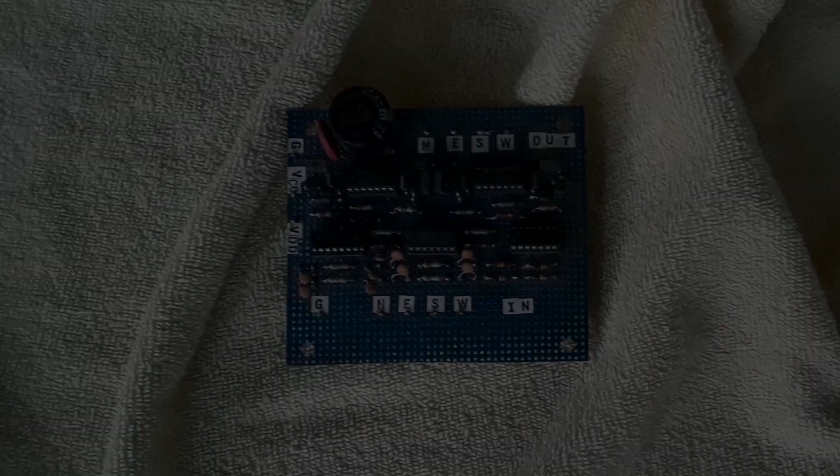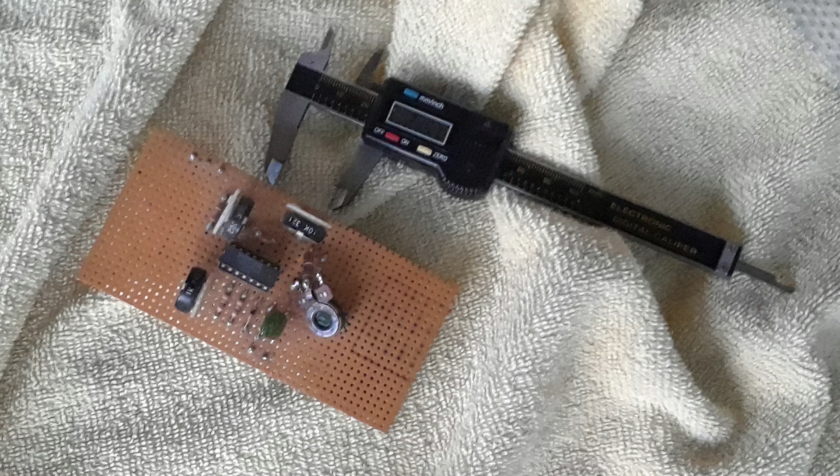Imagine a world where you just built a project, and this project turned out so well that you thought, hey, this thing needs a cabinet. Imagine further that all you had to do was measure the board, start a program, and drop just 4 dimensions into that same program. In a minute or two, you had an STL file ready to send off to your 3D printer. Find that hard to believe?

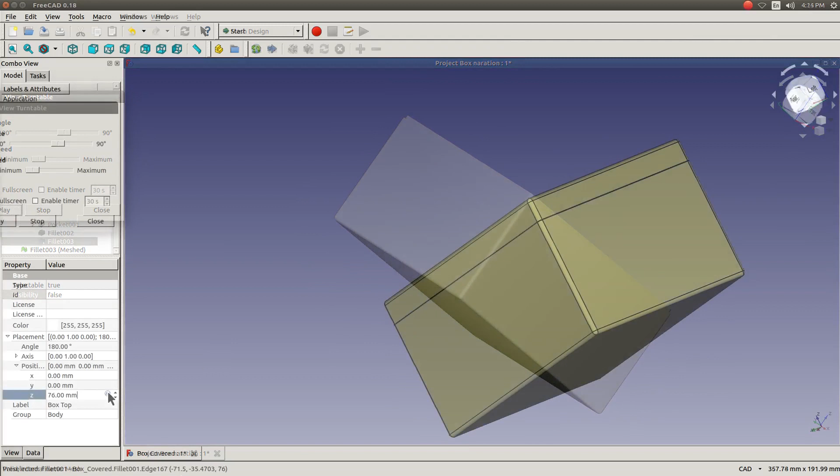Well, think again. The year is 2020 and the process is called parametric programming. Once you learn the process, you'll never have to suffer the drudge work of creating another cabinet drawing again, and it's surprisingly easy to do. Today I'm going to show you my program and how you can custom create your very own. So sit back and get ready to hand more drudge work off to your computer. After all, isn't that where drudge work belongs?

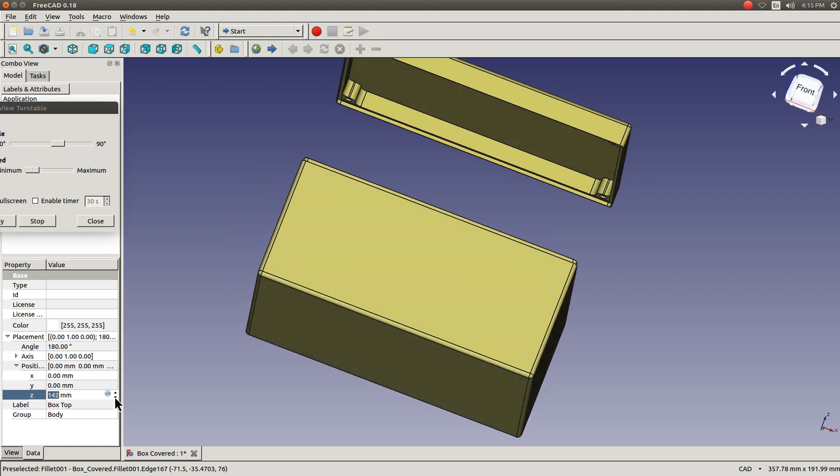As part of the maker community, sooner or later you're going to need a container to house projects like these. On the left is a kit which included no cabinet. On the right is a scratch-built function generator. It was a quick and dirty project which I never considered permanent. Though rough and crude, it turned out to be so useful that I decided to give it a permanent housing.

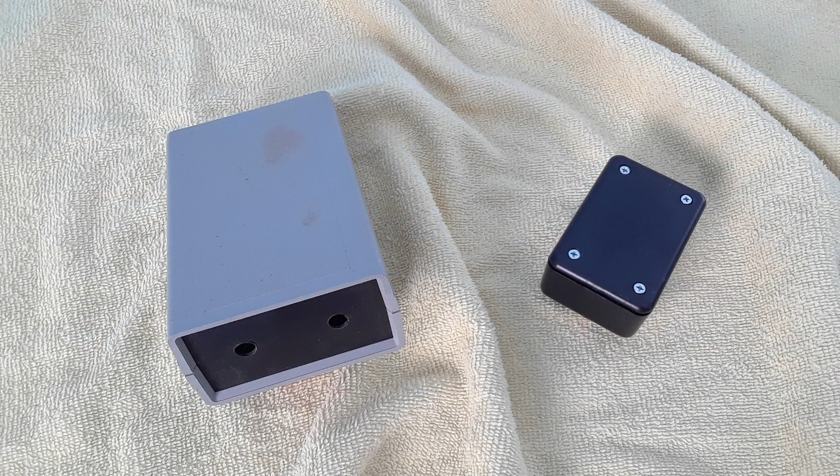If I decided to buy an enclosure, I would have to search the net for a suitable compromise. As you can see, these things are usually oversized or overpriced. Additionally, they're really not exactly what you're looking for in the first place.

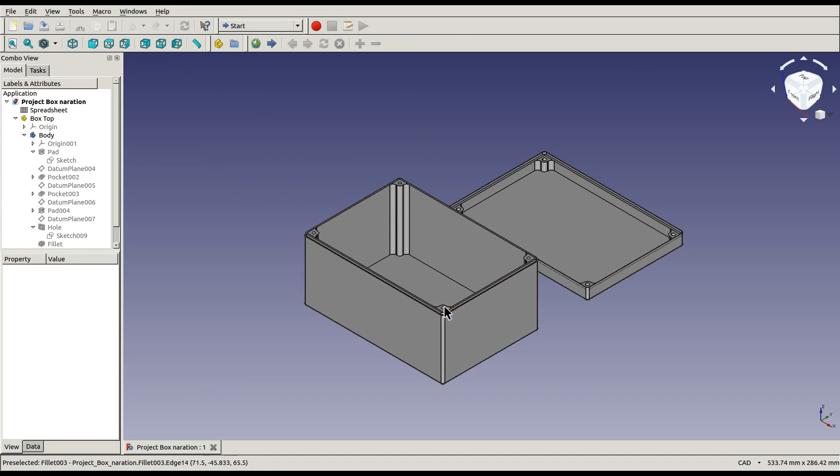Here we have the enclosure we're going to create, though we haven't yet told FreeCAD the size we want. Also notice there are 4 bosses, 1 in each corner, with a hole to accommodate a screw. Looking at the box from the bottom, notice the 4 screw holes, which are countersunk to accommodate a flathead screw. FreeCAD is a real nice tool to do this sort of thing in just one step. We'll cover this tool in detail much later.

Again, looking at the top view, I want you to notice the distance of the flat part of the wall. For the current screw size selected, this dimension, including the wall thickness, is always 24.7 millimeters smaller than the outside dimension of the cabinet. As long as you don't change the screw size, this will not change. Later in this series, I'll show you a simple way to make this measurement.

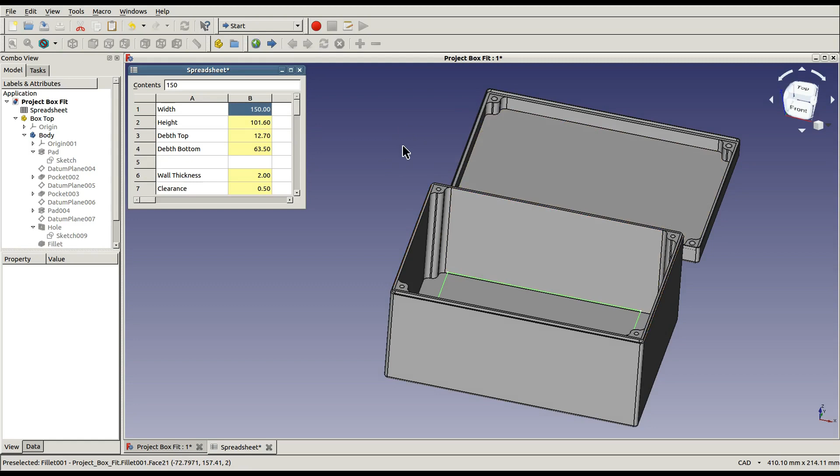Anyway, back to the project at hand. Before we get into this, I want to say that I'm going to deliberately leave cabinet space at both ends of the enclosure to allow space for outboard potentiometers, banana jacks, as well as a barrel connector to supply power.

I measured the board with an inexpensive digital caliper, though a simple ruler is more than adequate. The board dimensions are width 114.3 millimeters, height 57.15 millimeters.

As you can see from this view, I did the connections with a wire wrap tool. The distance from the pin bottom to the circuit board is 18.843 millimeters.

The thickness of the circuit board is 1.55 millimeters. The distance from the top of the board to the highest component is approximately 21.87 millimeters. Adding all of the height dimensions gives a total of 42.263 millimeters. We'll break this total down, giving part to the box top and the rest to the box bottom.

These are the 4 dimensions I was talking about at the beginning of the video.

We're back again at the enclosure drawing, and as you can see, there is a small spreadsheet insert in the upper left-hand corner of our drawing. Unfortunately, all of the dimensions in that sheet describe the outside of the enclosure. Thus, it will be necessary to calculate these values based on the size of our board. Also notice that I created a sketch which floats above the floor of the box bottom. This is really not part of the parametric drawing. It's simply an aid to check if we made any serious blunders in our box calculations.

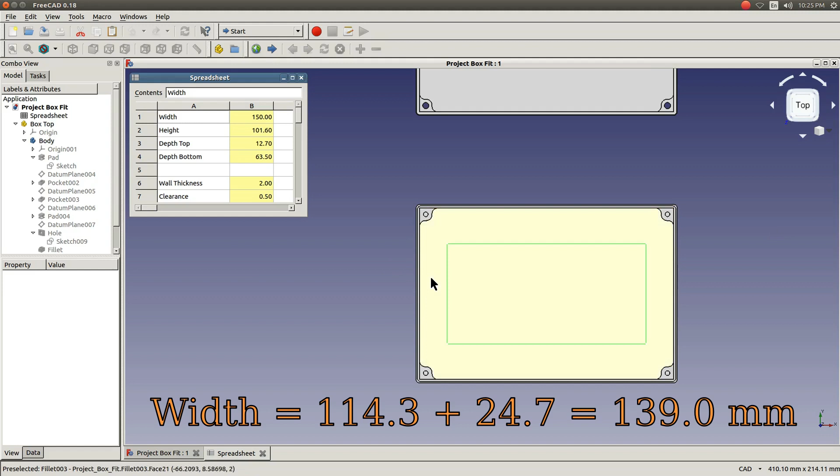The height is found by adding 57.15 millimeters plus 2 times 2 millimeter clearance. We'd like 2 millimeters of clearance above and below the board, plus 2 times the 2 millimeter wall thickness, giving us a total of 65.15 millimeters.

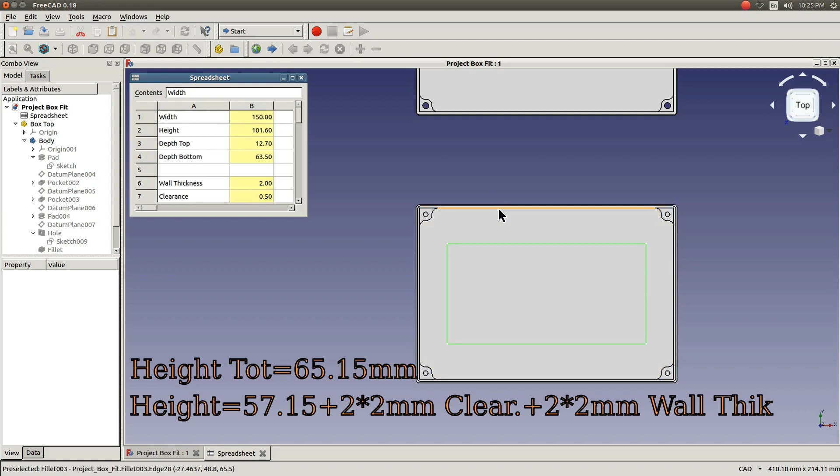As for the depth of the box top, I've arbitrarily chosen 9.5 millimeters. Adding this to the 2 millimeter wall thickness gives us a total of 11.5 millimeters.

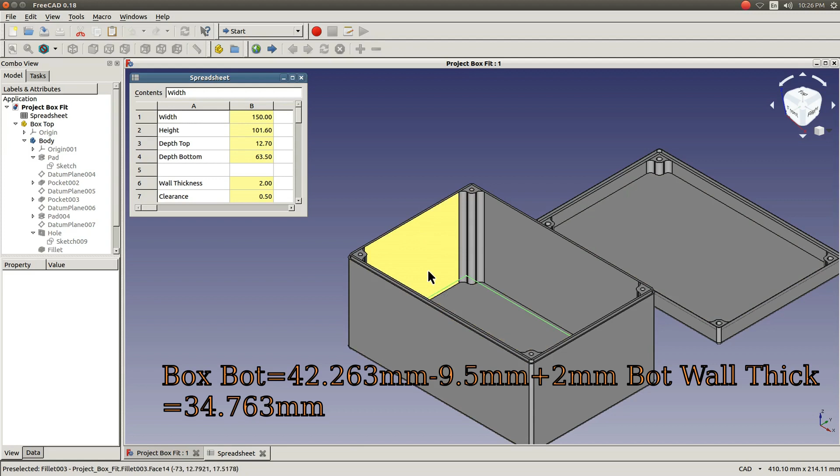Subtracting this from the total board height we found earlier gives us 42.263 millimeters minus the 9.5 millimeters we just chose, plus the 2 millimeter wall thickness, gives us a total of 34.763 millimeters.

This completes the 4 dimensions we'll need, so let's begin punching these values into the spreadsheet. Before we do, I want to mention that my best computer is suffering an intermittent problem, so I had to fall back to the computer that I usually use for my CNC machinery, which is nearly old enough to vote. If you have a newer computer, it's likely that these response times to the values we enter will be much faster than what you see here.

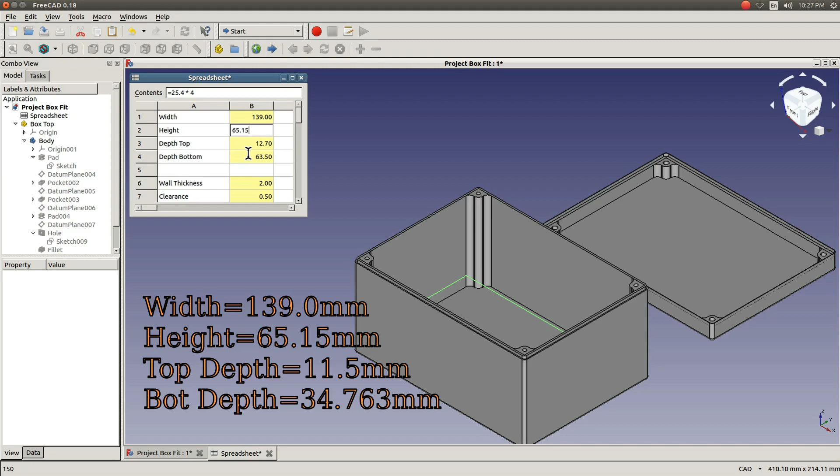First, we'll enter 139.0 for the width. Next, we'll enter 65.15 millimeters for the height. We'll now enter 11.5 millimeters for the box top depth.

Lastly, we'll enter 34.763 for the box bottom depth.

We now have the completed box ready to convert to a mesh file and send off to our 3D printer.

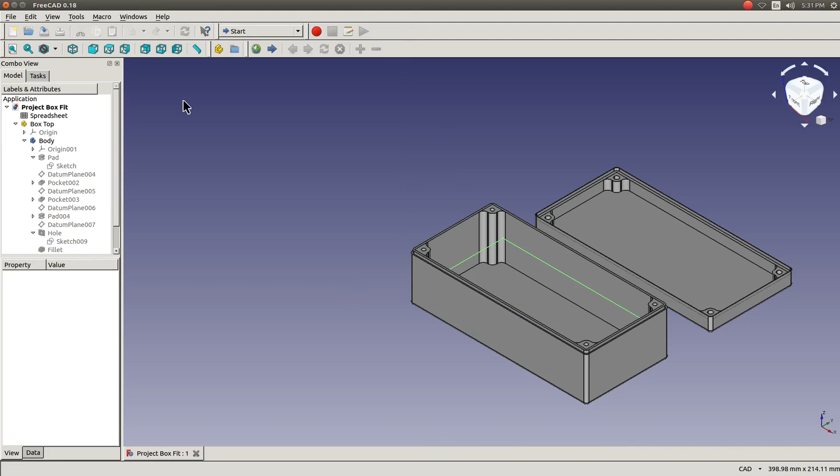Anyway, back to our model. From the time I began punching these last 4 dimensions into the spreadsheet to the program displaying a model ready to convert to an STL file, took only 1 minute 6 seconds. Seriously? I don't care how good a programmer you are in CAD, or for that matter, what CAD program you're using. No one, and I mean no one, can create a project enclosure from scratch in 1 minute 6 seconds.

For our last step, and yes, every CAD modeler has to do this, we need to convert our enclosure to an STL file. First, we need to select the Mesh Design Workbench from the drop-down menu.

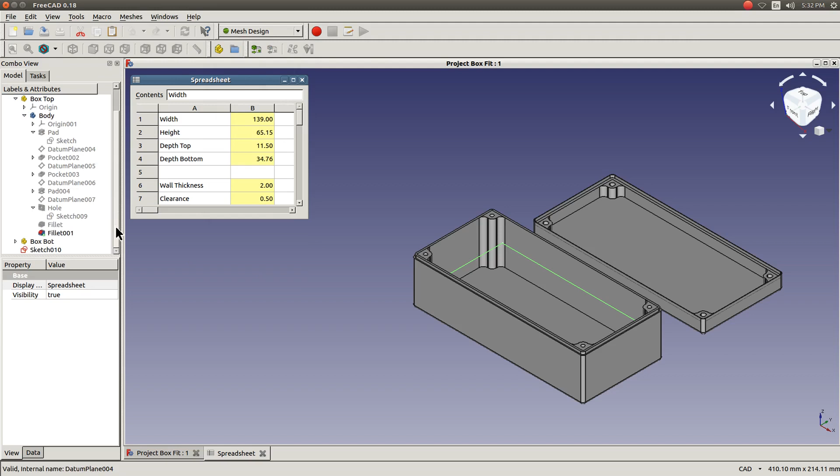Then, from our combo view, we need to select the model tree. From our box top tree, we'll go down to the bottom and select Fillet 001. You'll now notice that the box top is highlighted in green.

Next, we'll go to the very top toolbar and select Meshes. From the drop-down menu, select Create Mesh from Shape. From the combo view, which has switched from Model to Tasks, select the Standard Option button and press the OK button.

You'll now notice the box top has been enveloped in a mesh. To better see the mesh, from the model tree, again select Fillet 001. From the menu directly below, select Visibility True and convert it to False. Although this step is not necessary, it makes it easier to see our box top mesh.

Now go to the very bottom of the model tree and notice an entry labeled Fillet 001 Meshed and select this entry. If you look at the bottom row of the top toolbars, you'll notice 4 icons have suddenly changed color. We're going to select the icon which exports a mesh to a file. If you're in doubt as to which one that is, just hover your mouse over each button. An explanation of the button will pop up.

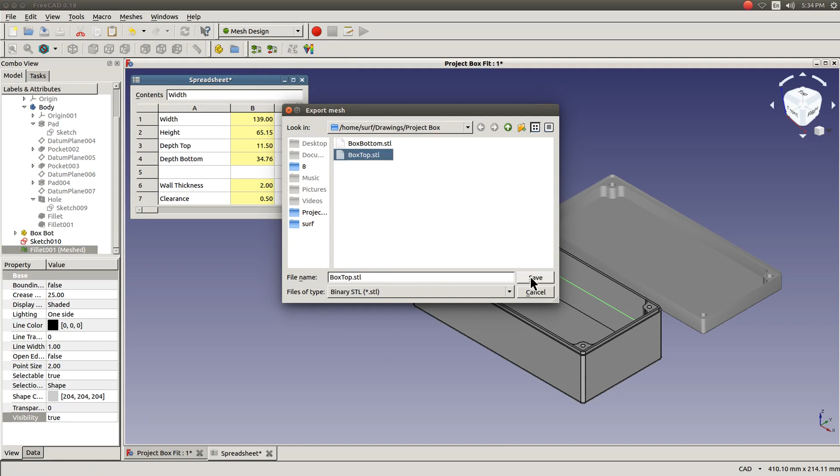You'll now notice a file menu appear, directing you to enter a name for your file. In my case, I'll choose Box Top, then press Save. Notice that I got a message that this file already exists. I'm going to press the Yes button because this file was for another enclosure which has been copied off to my slicer program. We're now going to close our box top tree and open our box bottom tree.

Heading to the bottom of that file, we'll select Fillet 003 and notice it gets highlighted in green. To save you from the boredom of watching me repeat this process, I'll just say that from here we'll repeat the same steps we did for the box top.

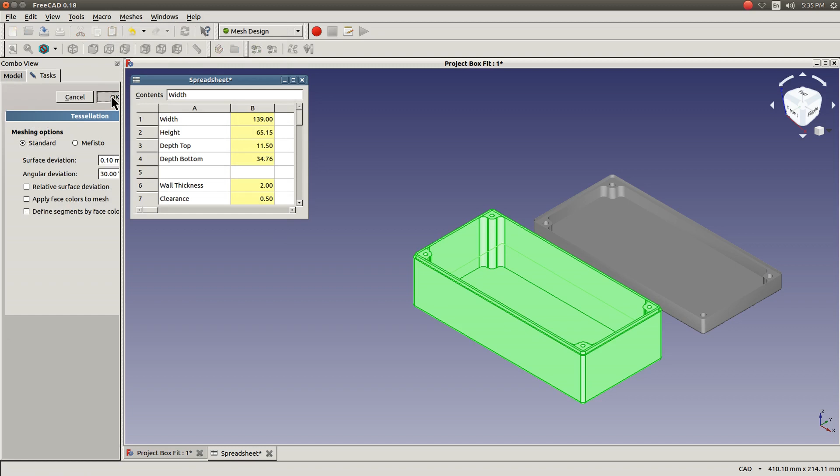Well, there you have it. A project ready to send to your printer for a fraction of the cost of even the cheapest enclosure you might find on the net. You might now say, but can't a 3D printer also print the holes for your project's shafts and connectors? Yes, but this will come much later in this series. At this point, I have taken you to a place you would be if you went out and bought an enclosure. Except, of course, that this is exactly the size and color that you wanted.

You've seen my program in action. Now it's time to have a look at yours. The next step on this road is to take a closer look at that spreadsheet. Don't worry, this sheet is far less complicated than the one in your office suite, which I'm sure you've already used.